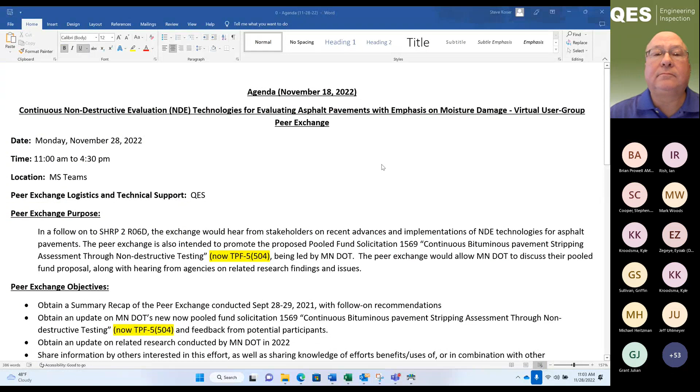Welcome to the Continuous Non-Destructive Evaluation, or NDE, technologies for evaluating asphalt pavements with emphasis on moisture damage, virtual user group peer exchange. We have it scheduled for 11 a.m. today to 4:30 p.m. Eastern time.

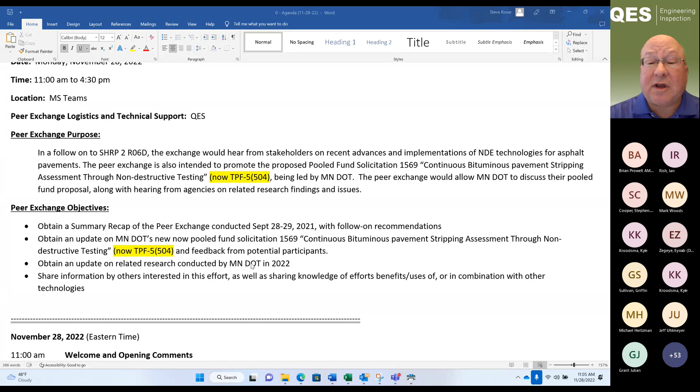Also obtain an update on related research conducted by MnDOT this year in 2022, and then share information with others interested in this effort, as well as sharing knowledge of the benefits and uses of, or in combination with, other technologies. So that's the purpose and objective for today.

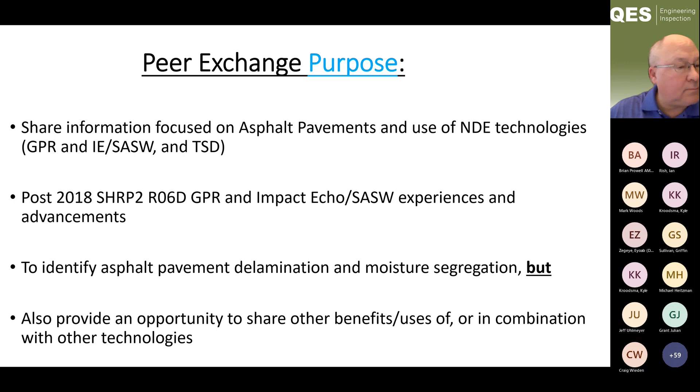What's happened to these efforts since the R06D, and to focus on the delamination and moisture segregation issue with this particular offshoot of the R06D, and to be able to capture experiences of others and advances in the technologies the vendors are making.

Next, Steve. The objectives included having a recap of the actual last R06D meeting in August of 2018. Share agency experiences, and we'll quickly go through those and identify the advancements that vendors had made since 2018, and we'll summarize those again quickly as well.

Next. Identify gaps hindering advancements, specifically focusing on system improvements, research needed to fill those gaps, and identify strategies to continue the progress of the effort for NDE. Next, Steve.

So we started out with a recap of the actual R06D research work that was presented by Mike Heitzman, who was the PI on that effort, and provided us a very good background. We'll quickly recap some of that.

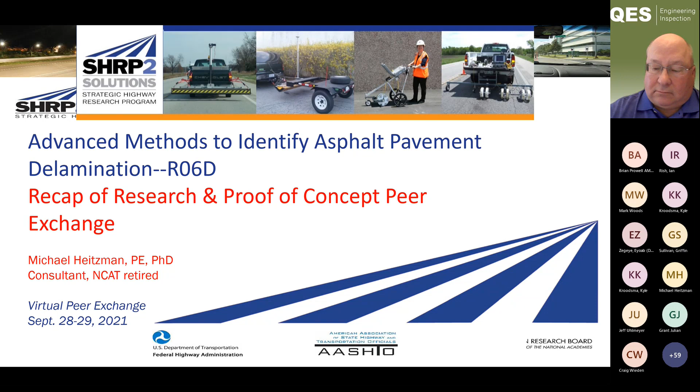So the goal is to identify and develop NDE technologies that can detect delaminations, operate at reasonable traveling speeds, and capture data from a full lane width. Three NDE technologies that were identified during that effort was ground penetrating radar, the impact echo, and the spectral analysis of surface waves.

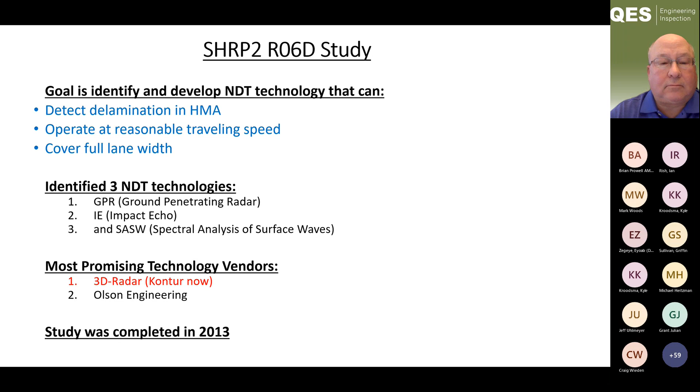Coming out of that effort, the most promising technologies were determined to be the 3D radar, which is now Kontur, and Olson Engineering's work with the impact echo spectral analysis of surface waves. And that effort was completed in 2013.

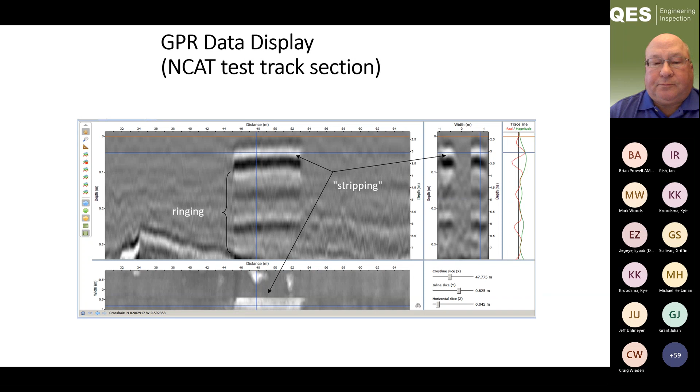This one, and probably most of you are familiar with this, is the gray band signals that are used to interpret ground penetrating radar, and as indicated by the arrows, some indications that stripping is showing up in this signal.

So quickly to talk about some of the vendors involved, GSSI participated to look at things like delamination detection, layer thickness, subsurface conditions, and void identification.

3D radar, or now Kontur, presented this version of a prototype for capturing full lane width data using 3D radar systems.

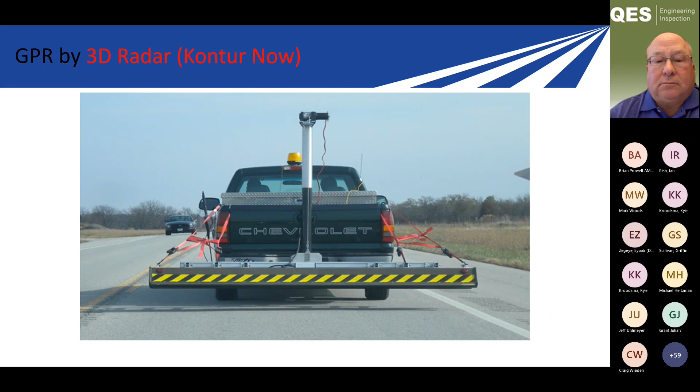There was some development work taking this forward with the focus on increasing from single point measurement or single line measurement to broader width measurement across the lane.

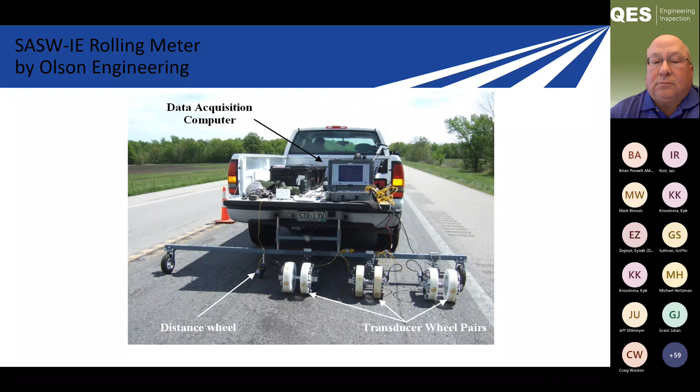So Mike Heitzman's summary said that the vendors need agency interest to support their development in the systems, and the agencies need implementation or implementable systems before investing in the equipment. So we have this kind of need from both sides of the issue that each depends on the other side.

So that's one of the big values in having these peer groups together, so that we can talk about those, focus on those, and learn from each other as we go forward.

Mike concluded that both technologies, the GPR and the impact echo and SASW, have strengths and weaknesses. They can be used for multiple agency evaluations of pavements. Seemed to be most useful, at least at that time, for project development, and not so much ready at that time for system-wide analysis. Both technologies need better automated analysis software.

A large amount of data is produced, and it's difficult for the users to deal with that unless there's a tool to help manage that data and to make it useful. And at that time, the return on investment seemed better focused for rehabilitation projects, with the emphasis on getting better data in design and limiting change orders that happen in the field because of minimal information that we've had historically.

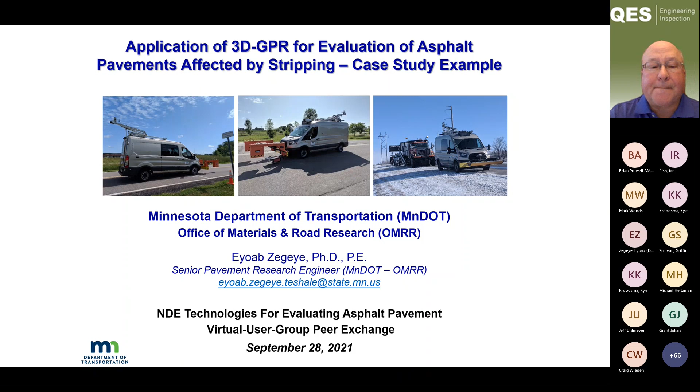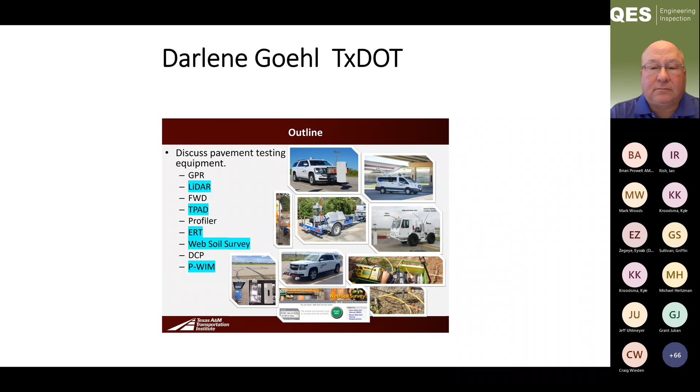Darlene talked to us in a very interesting perspective about how TxDOT combines different NDE systems to collect information that helps them build a better picture of the conditions in the pavement and how it's being used in their project development.

Brian talked to us about his work with the TSD and VDOT's experience in using the TSD, which is very interesting information and something that people have been working on for quite a while now, about 30 years. So it seems to be maturing and coming to a useful situation.

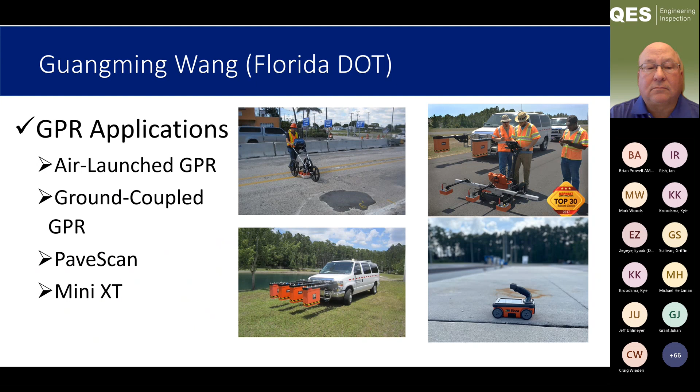Guangming talked to us about the different types of devices that Florida has worked with and are trying in their efforts to collect better pavement information. Several are listed here and some photos of their efforts.

Bill Owen talked about the Caltrans experience with the GPR. They go back a couple decades and have been working with this for quite a while. A lot of their work has focused more on the assessment of concrete pavements, but it's still the application of the GPR and interpretation of those signals.

And finally, Brad talked to us about the work that has been going on in Kentucky and pointed out that early on in the R06D, they got the 3D radar sensors, but they had to develop their own system for mounting the device to collect data on the highway. So that was an interesting and somewhat unique aspect of what he came up with.

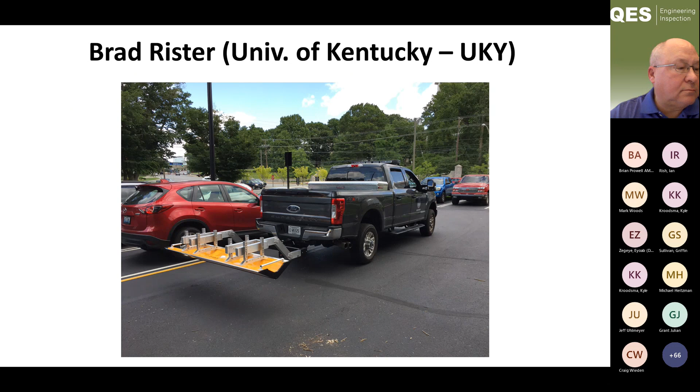We followed that with presentations from the participating vendors: from 3D Radar, Jacopo Sala; Larry Olson from Olson Engineering; Rob Sommerfeldt from GSSI; Ken Maser from InfraSense; and Timo Saarenketo from Roadscanners, all talked to us about what they've done, the progress they've made, and what's going on in their particular sphere of this technology. So we'll scan through those again quickly.

Jacopo introduced the 3D radar system, which includes collection of data at highway speeds, a data processing system for the three-dimensional data, and how the technology and product components come together.

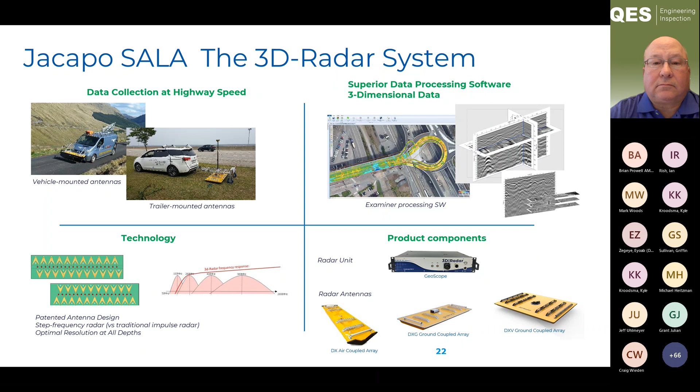Larry Olson gave us an overview of his development of the impact echo and spectral analysis of surface waves, and the development work they have done, and their ongoing efforts to continue to promote and improve that technology.

Rob Sommerfeldt talked to us about what GPR is, how it's used in determining layer thickness, void, subsurface evaluations, and numerous other applications.

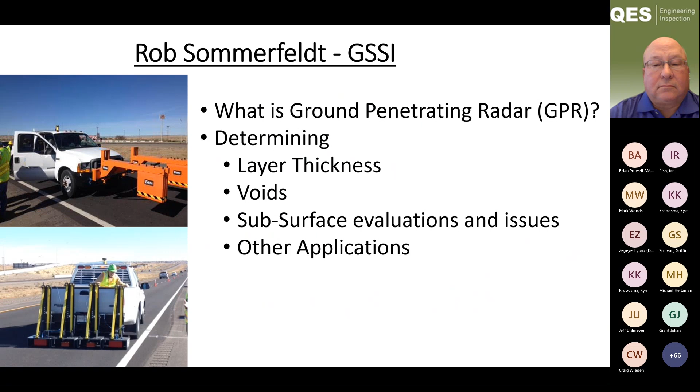Ken Maser from InfraSense talked to us about the discussion of technologies, including GPR, 3D GPR, and the TSD, with applications for pavement management, pavement rehabilitation design, in-place recycling, density quality assurance, and failure investigations.

And finally, Timo Saarenketo talked to us about the Road Doctor vehicle that they use for survey and the multiple technologies that have been incorporated into a single vehicle to pull the data together and get better interpretation of the various component parts.

We then followed that with a discussion of current and future needs and identification of gaps. We looked at questions including what research is needed, what improvements are needed to promote widespread use, where do we go from here, and what kind of support level is needed to continue to move forward with this technology effort.

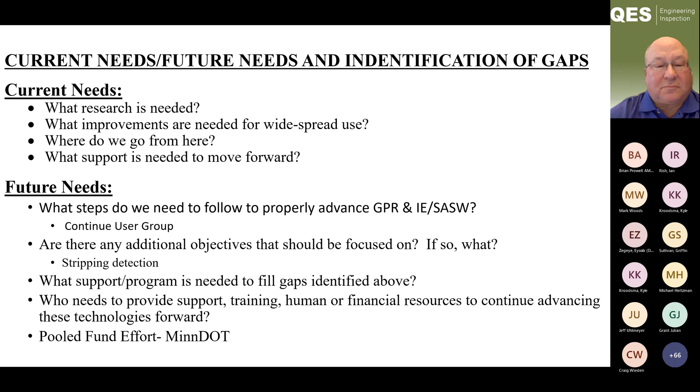We talked about possibilities of how support can continue for this effort, and as Steve Kozer said, Minnesota is leading a pooled fund specifically devoted to this particular objective.

So we talked about strategies and how the individual areas of NDE applications should be identified. Those applications include use in planning, design, construction, and quality assurance.

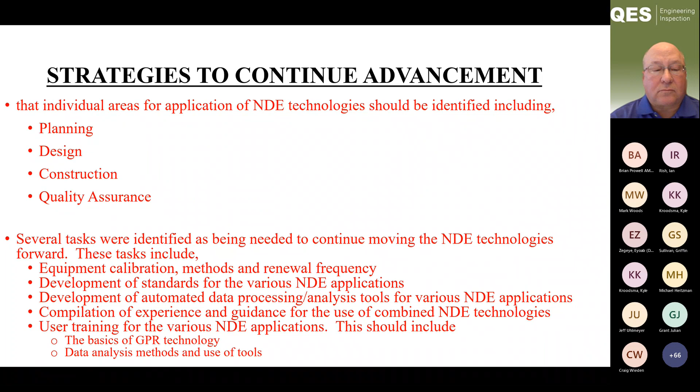Several tasks were identified as being needed to continue to move this forward, including methods for equipment calibration and renewal, development of standards for various applications, development of automated data processing analysis tools for various NDE applications, compilation of the experience for the use of combined NDE technologies, and how user training should move forward, including basics of GPR technology and data analysis methods and use of tools.

So I think that pretty much wraps up the quick summary of the previous meeting we had last year.

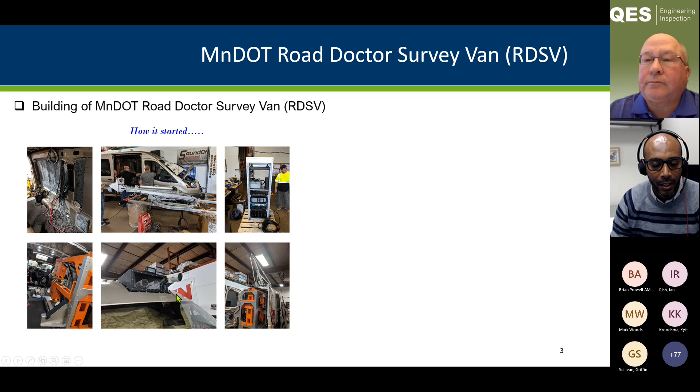So what is interesting about this road doctor survey system is that it has multiple sensors that are linked to one navigation system, so that you can basically connect, link, or fuse the data from all these sources to have a better understanding of your pavement condition, both on the surface and also in the subsurface.

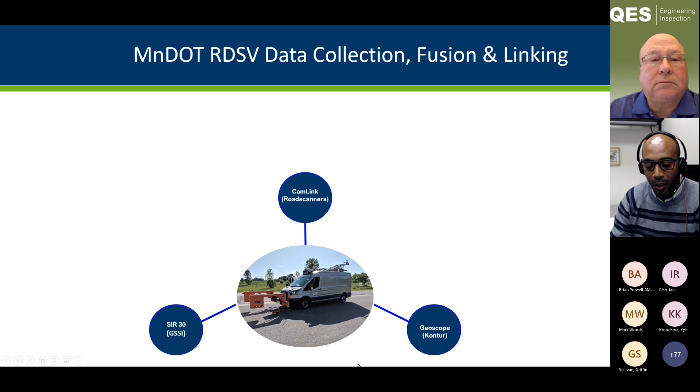So the three main computers, data collection controls that we have in the van, are Camlink, Roadscanners' CamLink, GSSI SIR30, and Kontur's Geoscope. The Camlink governs almost most of the sensors, including the positioning and navigation system, GPS, IMU, and DMI, two high definition video cameras, a thermal camera, and an accelerometer for roughness, ride quality, and the LiDAR scanner. The LiDAR scanner, as you can see, is on the end, on the back of the van.

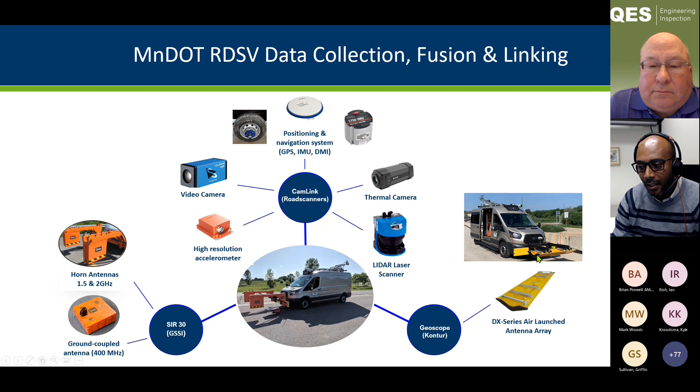The SIR30 controls the two horn antennas in front of the van, you can see here, and the ground coupled GPR antenna. The Geoscope controls the 3D radar antenna that we have. As you can see, the van is designed to accommodate both the GSSI antennas and also the 3D radar or Kontur antenna, and the Geoscope controls it.

For data processing, we use Road Doctor and Examiner software. The Road Doctor is suitable for processing all the data obtained, collected using the system, while Examiner is more suitable for the GPR, 3D GPR analysis. And you can also load the video image so that you can use it to help the interpretation of the GPR.

Before I talk about how we use this technology, let me take a brief detour and explain some of the challenges in adopting innovative technologies in the pavement industry in DOTs.

Through my experience, I have seen a lot of excellent research and innovative technologies come out from research and development, but fail to attract enough attention to move on. Ideally, once these tools come out from research development, they would transition to DOTs or road owners, to road authorities for implementation.

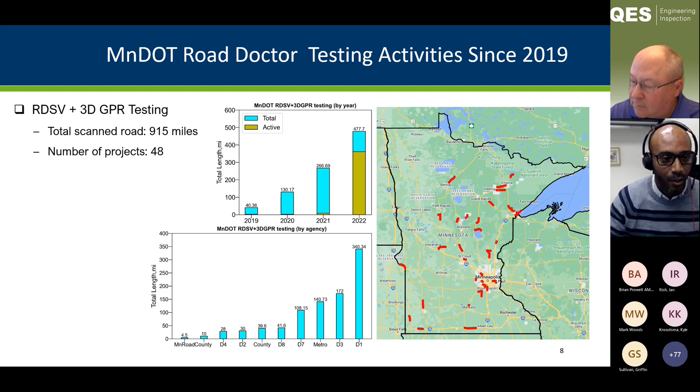So just to give you some examples of the research studies we are conducting, one of the early studies we did was using the Road Doctor, especially the data fusion capabilities of the Road Doctor, for studying tenting on Minnesota pavements, especially on colder region pavements — tenting or crack heaving studies.

I won't be able to give too much information on this, but if you are interested, we do have a published paper on it here on the right, or you can send me an email. We can talk more about it.

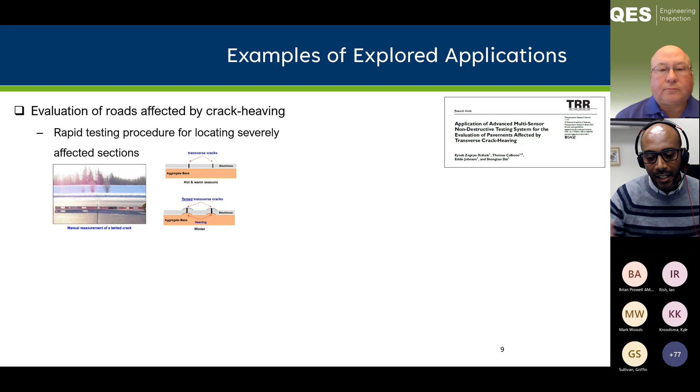And then finally, by analyzing all this data coming from IRI, elevation profiles, and GPR, we were able to provide a rapid testing procedure for locating and characterizing pavements affected by tenting.

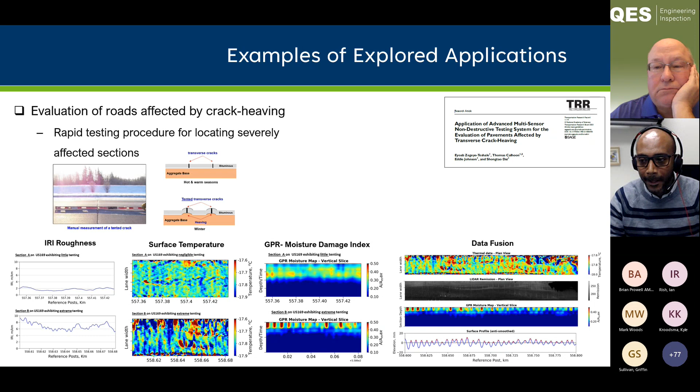We often use the system also to detect sinkholes or voids under concrete. This is not always successful, because depending on the type of pavement, some concrete pavements are highly reinforced, or the pavement condition may not allow it. But most of the time we've been able at least to pinpoint suspect areas for further investigation. We've done sinkhole detection both before and after grouting, just to see how effective the application is. We did find the ground couple antenna is better suited for this type of application.

Here I'm showing you an example where we're trying to see if 3D GPR could also be effectively used to check the alignment of tie bars or dowel bars.

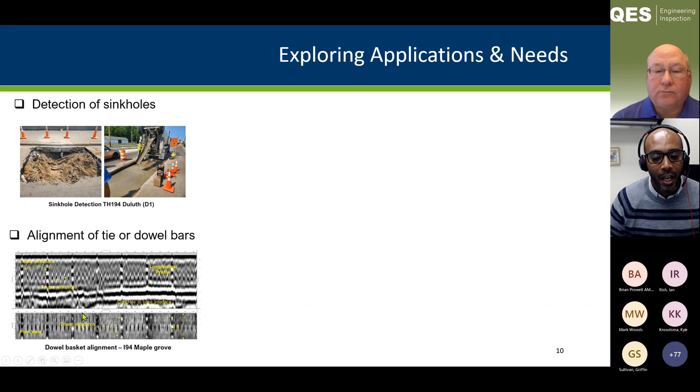Another example is the research study we conducted at the MnROAD cells for over two years now, using the GSSI ground couple antenna at the beginning. What we were interested in is whether GPR can be used to measure or assess the moisture content in the foundation of in-service pavement, to see the moisture fluctuation across the season.

This is useful in many ways. One is that it's important for us to measure the moisture fluctuation, especially in March during the spring thaw period. But this could also be a very useful tool to find areas that could be easily affected by stripping, because the more moisture you have in the pavement, or the more moisture susceptible the pavement, the more likely it is to create a good platform for stripping.

So here the chart shows GPR estimated volumetric moisture content compared to in-place sensor estimated moisture content. As you can see, we saw very encouraging results.

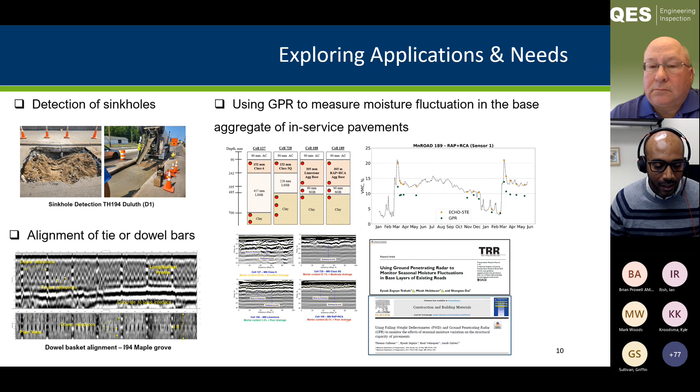We published these results in a TRB paper, and also another paper where we saw the relationship between the GPR indexes and falling weight deflectometer (FWD) indexes. Currently we're working with Contour 3D data, trying to see if the same thing can be achieved using the full length 3D GPR ground couple antenna.

So with that, I would love to talk to you a little more about some of our efforts to incorporate 3D GPR into the MnDOT project scoping process.

In the project scoping process, the main task is to gather key engineering data that will help us select the proper rehabilitation for our pavement. The two main pieces of information are the thickness variability, both longitudinal and transversal, and the structural adequacy of the pavement.

You want to make sure the pavement is strong enough, or that the remaining pavement that has not been rehabilitated is strong enough to support the new traffic and the construction equipment.

For example, if you decide to use a cold in-place recycling or a white topping option, it's important to know the thickness of the AC layer in order to determine the proper target mill depths, but also to know if the remaining pavement will have adequate support and bearing capacity to support the construction equipment and the new pavement and traffic.

This adequate structural support is not only a function of thickness, but also of the quality of the remaining pavement. If this remaining pavement is deteriorated, if you have a lot of stripping, then you'll be forced to reconsider your rehabilitation. We've seen this in many of these projects.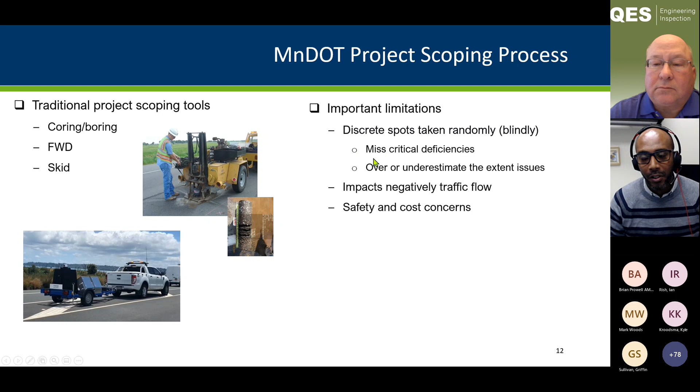So far, we've been doing this using traditional project scoping tools like coring, boring, FWD, and skid. But these tools have some important limitations. Especially coring and boring, they are destructive. But the main limitation is these are discrete spots taken randomly, blindly. You don't know what is going on beneath that pavement, so it's very likely to miss critical deficiencies or to over or underestimate the extent of these issues. They also impact traffic flow negatively, and come with safety and cost concerns to the public and operators. Because of this impact, you're constrained on how many tests you can do in your project.

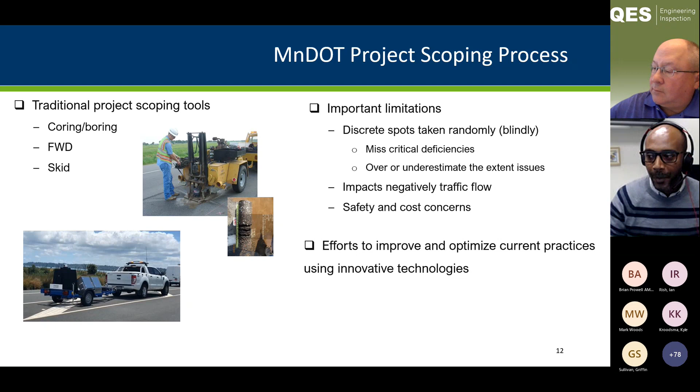Because of this, we've been trying to improve these practices using innovative technologies. One easy, quick advantage of 3D GPR is to use the 3D GPR images to guide the coring and boring practices in our project scoping. We don't necessarily have to replace them, because you still need coring and boring to get a feeling and visual understanding of the material, but you can do this strategically by collecting coring and boring where it's needed.

For example, here I'm showing you a GPR image where it's a clear image. You do see the interfaces of the two layers clearly visible, and the pavement is very homogeneous, so you don't need that many corings—just a few, maybe for calibration and to see what's going on beneath there. On the opposite, you see here sections that may require more testing, more GPR coring, where you can strategically select these areas for coring so you know what is going on.

If we had done this randomly every tenth of a mile, we probably would have missed these sections, and we would have generalized what we saw in those sections to the entire road. This type of intelligent coring has been very helpful to reduce the number of spot tests. We can also use this information to prioritize which lane to core or which not, reducing impact to traffic and mitigating safety and cost concerns.

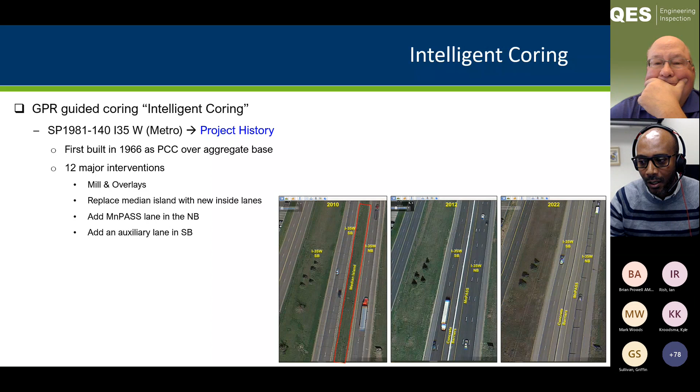In this case, this pavement was subjected to numerous mill-and-overlays. The median was replaced with an inside lane; they created a managed lane only in the northbound direction and added an auxiliary lane in the southbound. You can imagine how some of this information may get lost over the 50 or 60 years it's been there. So when the engineers approached us to analyze and evaluate this pavement and see what's going on in the subsurface, we used the 3D GPR and intelligent coring.

How do we use intelligent coring? As you can see here, I'm showing three different lanes of the pavement. The first thing we saw was that the middle lane and the outside lane were almost completely similar, so there was no need to have cores taken on the mid lane and add additional burden to traffic. Between the mid lane and outside lane, we focused most of our coring only on the outside lane. In this first southern portion of the road, it was pretty much uniform and homogeneous—we clearly identified the lanes and interfaces—so there was no need to put too many cores there.

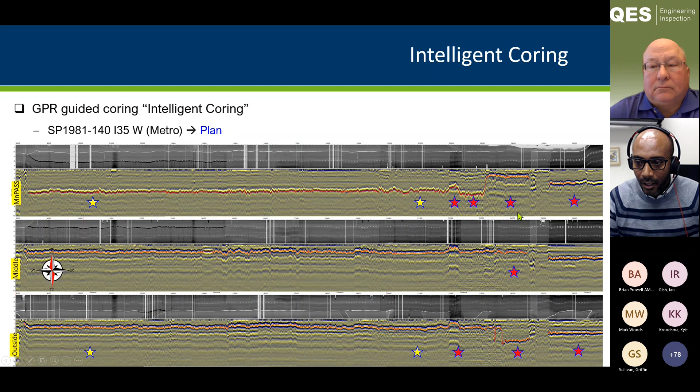On the other hand, on the northern portion of the road, we did see certain strong anomalies that we wanted to test, so we had more corings performed in this area. Here is the result of the study. As you can see, we were able to pinpoint all the transitions and also able to see the different pavement structures.

As you can see, these transition points are not easily achievable using coring or boring. But most importantly, we were also able to identify sections that were not previously well documented. So the engineers were not expecting to see a 13-inch bit on this end, and on this other end of the road, but also this 13-inch full depth bitumen. So this is kind of how the new technology can supplement and help the existing practices.

Another effort that we've been doing—at the beginning I told you, how do you get all this data and transform it into a template that engineers can easily use to extract important information for them. So what we've been doing is creating some Excel macro templates for engineers to use and to read the GPR, 3D GPR results. These macros are given to them, and they help them explore what is the right milling depths.

Basically here I am showing you, this is the road, two lanes of the road, and here are the milling depths. What this chart is telling us is, if you cut this road at around 13 inches, you will be cutting on the top layer, on the asphalt layer. So if this is what you want, you will be ensuring that you're cutting only on the asphalt layer.

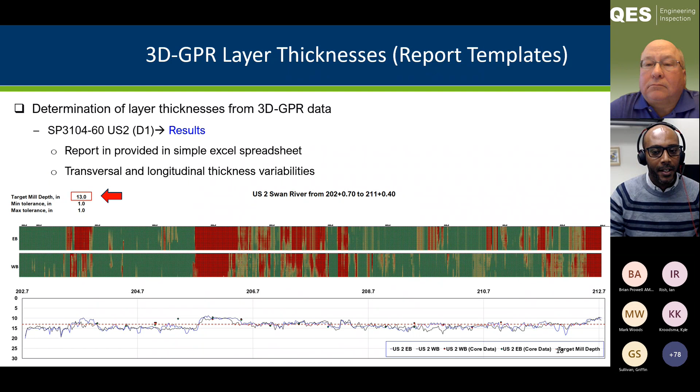And then here, finally, I would like to discuss some of the case studies where we are using 3D GPR to assess pavements affected by stripping. This isn't for all cases, but this is very helpful for the pooled fund study. This is kind of why we think the pooled fund study can be achieved, accomplished, and why it is important.

So here is a case study we've been working on for the last 3 years. What makes this project interesting is it's on Highway 71 in Bemidji, Minnesota. The pavement was first built in 1977, and it was a road mix—an asphalt mix prior to superpave—very susceptible to moisture, over a natural grade clay. Then in 2002, the top portion of the asphalt was replaced with a newer superpave HMA and PASB, which is a more permeable asphalt pavement type.

But then very quickly, the pavement completely deteriorated and became very rough, so they are going to replace it. When they went out and cored, this is the type of core they got extracted from the turn lanes. As you can see, in the turn lanes they were able to extract the entire bituminous layer—here you can see the old road mix, the PASB, and then the new superpave HMA.

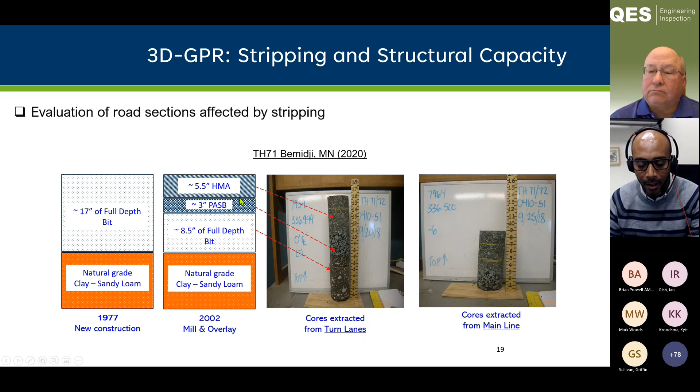Unfortunately, in the mainline, almost everywhere, they were not able to extract by coring the entire bituminous layer. This is because the old pavement in the mainline, where you also have traffic, was completely deteriorated due to stripping. So they were able to extract only the top layer, the newer asphalt bituminous layer.

So here, for example, are the coring results. The black bars are from the mainline, the cyan or blue are from the turn lane. As you can see, the only time they were able to extract the entire pavement bituminous layer was around 333 RP, and that was because that pavement section was recently completely reconstructed. Otherwise, they were able to extract only the top layer.

So how do we know there was something else here? Because they went on and did boring.

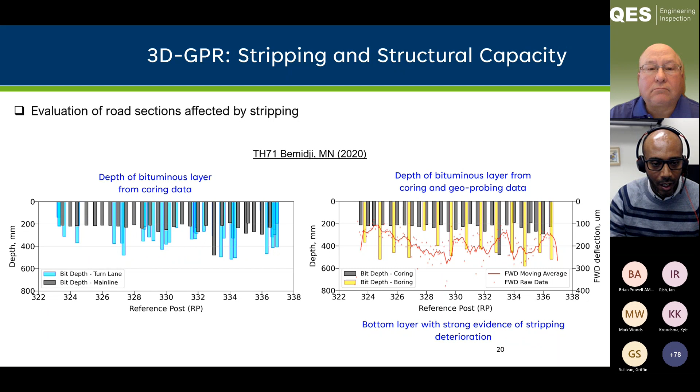As you can see in the boring, they were able to extract all this material, and then they found out that most of the time this material is also deteriorated due to stripping. So faced with this problem, they reached out to us to see if we can at least give them the layer interfaces, the thicknesses for the pavement with the 3D GPR.

And that's what we did. But on top of giving them the layer interfaces of the top and bottom, we also tried to come up with some methodologies for us to assess the severity of stripping on all the pavement sections.

We divided the pavement into 1 mile length loads. As you can see, here is an example of a pavement section which is in relatively good conditions. Here you can see the top layer and the bottom layer, and both of them are very homogeneous. This is a clear image, you can easily distinguish the layer interfaces.

And you don't see a lot of noise. By noise, I mean reflections other than the main ones we're expecting. We are expecting reflections at the interfaces. If you see other reflections between the interfaces that they were not supposed to be there, that's what I'm referring to as noise. So here we don't see a lot of noise, it's clear.

Compare that to a section which is highly stripped. Here you can see the first layer interface, but it becomes very difficult to see the other layer interface because there is a lot of stripping, a lot of noise going on.

So we try to use this type of image. This is qualitative, basically a visual examination of the image. What we try to do is transform this visual examination information into something quantitative, something that can be converted into numbers and compared to other pavement information.

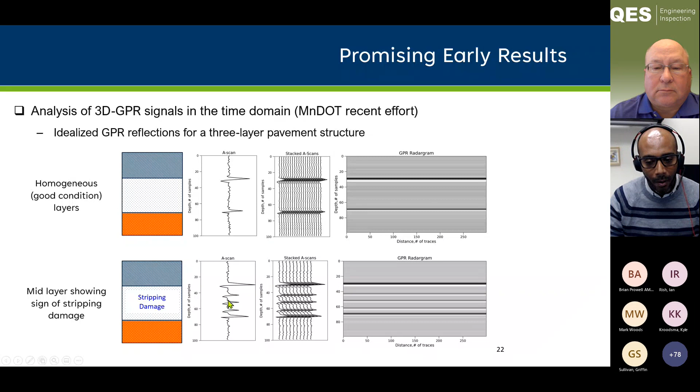So how do we transform this into a quantitative measurement? By doing some research, one thing we saw is that the positive reflections were related with stripping. There is research that shows positive reflections are related to stripping.

So what we did is develop an algorithm in Python. That algorithm was designed first to load and import 3D GPR data, and then to handle each of the traces, each A-scan, separately. Some of the analysis made on each A-scan were to identify the peaks and troughs automatically, and then compute a damage index.

In this case, we decided to use the sum of positive reflection. We did all this analysis in the time domain. There are others that also include frequency domain, but for us, we found this was an easy way of doing it - basically the sum of positive reflection from each A-scan trace.

So once you do this for 21 channels in 3D GPR, you can produce a 2D heat map that tells you what is going on, if there are areas with a lot of high positive reflection. By the way, this positive reflection, we were focusing only on the specified region, only in the layer that you decide. You can decide to look at the entire bituminous layer, or just focus on the second layer, because this is where we know there is a lot of stripping.

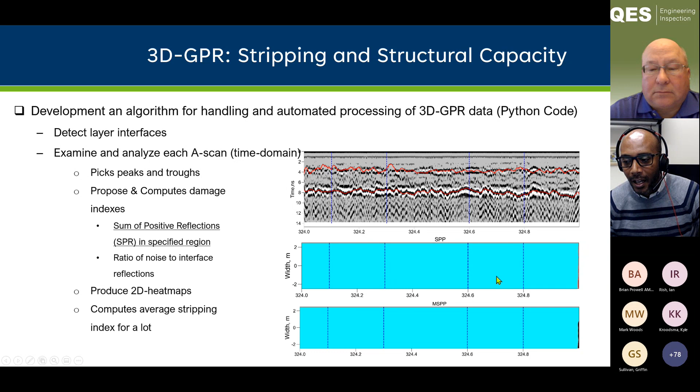By doing this type of analysis for the whole project, you can identify the areas where you have major problems, and areas that have relatively little problem. Then you can use this information to optimize your rehabilitation or repair treatments.

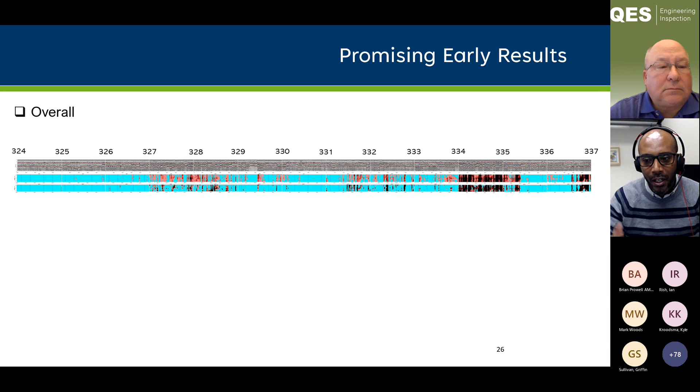But we didn't stop here. We went on because we also had FWD data for this pavement, and we tried to see if the stripping indexes from the GPR we created were somehow related to what we see from the FWD.

And why FWD? Because when you have a pavement which is highly stripped, that means the bearing capacity of that pavement also falls down.

So here, this is a pavement that we saw was in good condition, and here are the FWD deflection basins, taken every 1/10 of a mile. This is a 1 mile project. As you can see, there is a little bit of variability between the deflection basins, but they are very consistent, similar, and they go at about 150 micron.

Compare that to a section that was shown by the GPR image to be highly stripped. Here you can see the sections: first of all, the basin deflections were highly variable among themselves in a non-homogeneous pavement, and you start seeing numbers almost double the rate, 300 at the center of the plate.

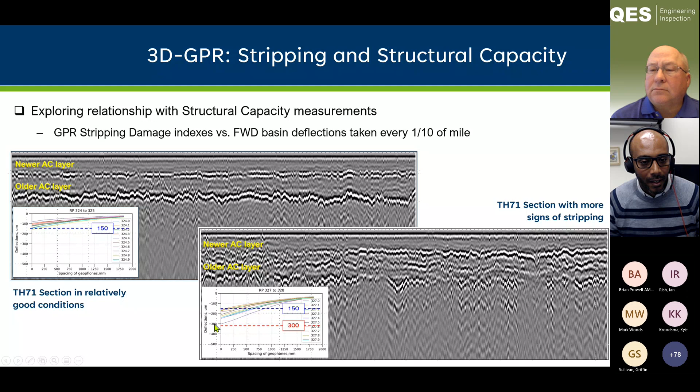So now we move on and try to see if there is a relation. Clearly, there was a very strong relationship between the sum of positive reflection that we saw and the deflection at the center of the plate. This is by no means the end of it, but these are encouraging results that can be useful for the pooled fund study. They ensure us that what we're trying to achieve with the pooled fund study is doable.

So with that, this is the first part. So I thank you, and if there are any questions.

I've been looking at the chat function. One comment was there's a lack of standards and specifications. Training and education could be added to your list. I think that was up around the first handful of slides. And then standards for both data collection and data analysis, presentation and interpretation, is what the one comment was.

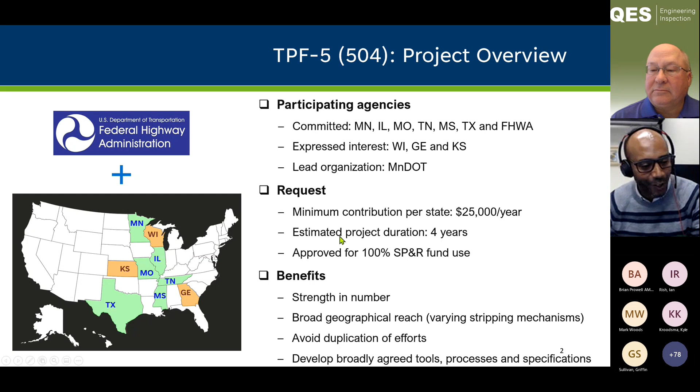So in the interest of time, I apologize, I will go quickly over this. When we created the proposal for this pooled fund study, we started from the recommendations of R060 and TAP studies. We had several meetings between us, MnDOT, and Federal Highways, and then we sent a proposal for review and comment from other experts.

We heard from Mike Hensman, Ken Maser, and other engineers from interested DOTs. So we try to put most of that information there.

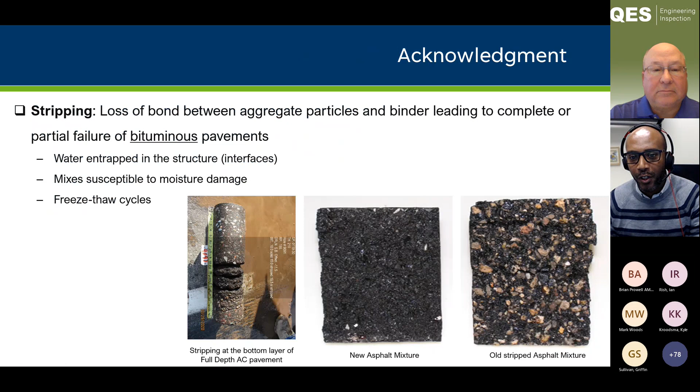So you are aware of stripping, and I touched on why. One question we received during the solicitation, when we were trying to reach out to states, was whether stripping is still a serious pavement threat, since we now have superpave performance, anti-stripping additives, polymer-modified binders, and improved drainage practices.

But unfortunately, yes, it is still an issue, because we keep building on old mixtures. The old mixtures are still beneath the new ones, so they remain susceptible to stripping. We are also using more and more recycled materials, sometimes recycling pavements two or three times, and lately using cold recycled mixtures that don't have the best quality, using emulsion rather than the newest, highest-quality binder.

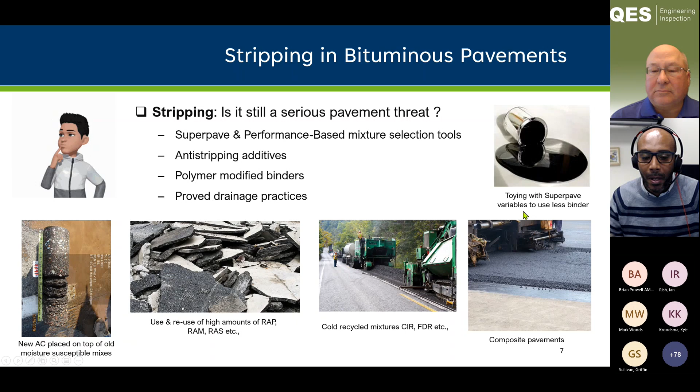We also have composite pavements where we see stripping at the interface between the concrete and the asphalt. And unfortunately, some contractors tweak the superpave mix design to use less binder. So because of this, stripping is still an issue.

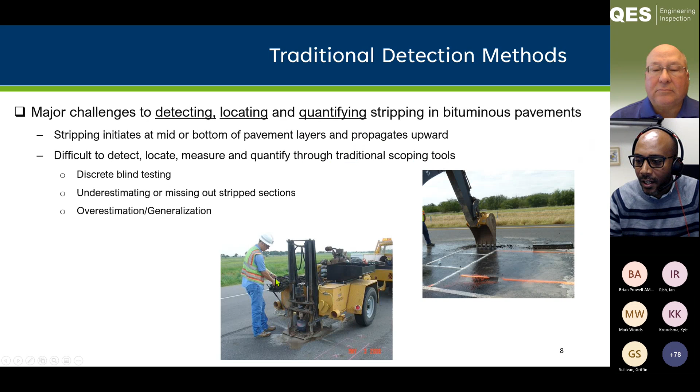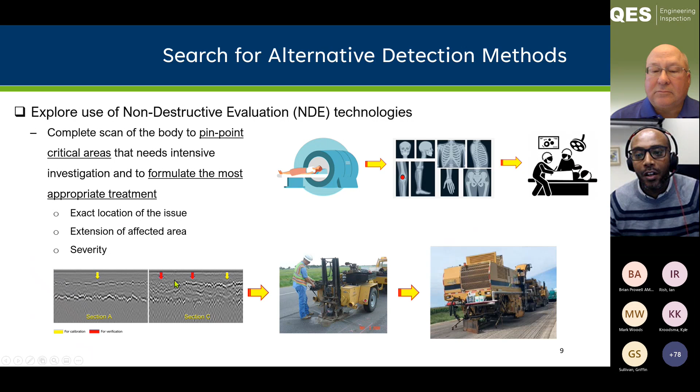I talked about how these traditional tools are kind of limited. What we try to do with innovative technologies is, like with a doctor, scan the pavement and try to find the area where you need to investigate. That's what we're trying to do with this pooled fund study, building on a previous study.

3D GPR is very suitable for this type of study for several reasons. It collects data at traffic speed, and it has different frequencies so you don't have to select which antenna is proper for the application. It's also very implementable - many states are already applying it. So why not focus on 3D GPR?

This is a new pavement, just recently paved - this is what type of image you see when you do 3D GPR. When you go to a pavement that is completely stripped, you see an image like this. So what we want to do is locate the extent and depth of severity of stripping immediately, in a rapid, automated way.

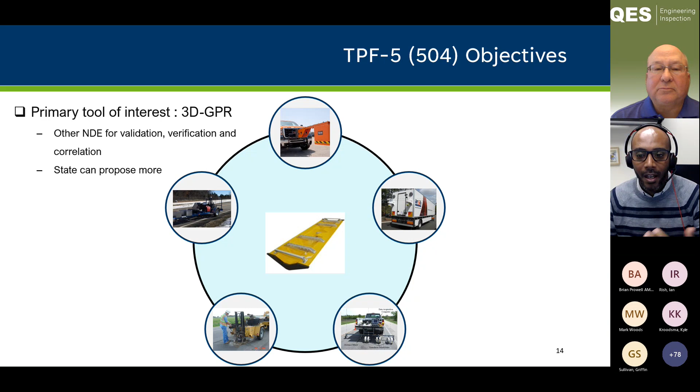For clarification, this study will focus mostly on 3D GPR, but we will use other NDE methods to validate what we see with it, so there won't be overlap with the other TSD program. We know 3D GPR doesn't necessarily work under all conditions, so we'll validate it with coring, boring, FWD, impact echo, TSD - all available methods. If all this information tells us something about stripping, that's also a welcome outcome.

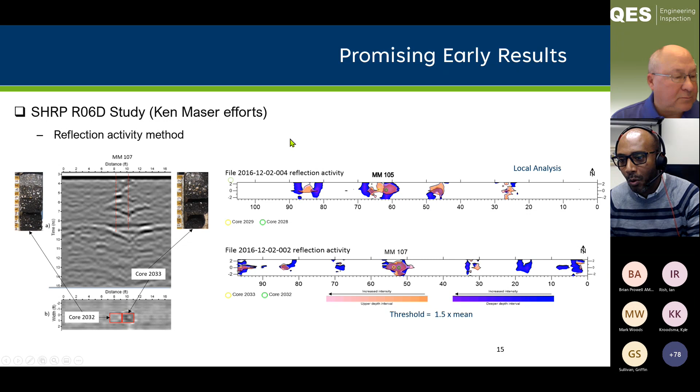We hope to have a project kickoff meeting in early February, where we'll discuss the project charter. Before the meeting, we'll send the final project charter and scope of work to all participant states so they have time to review them. During the project meeting, we will revise and approve the project charter and create a working group.

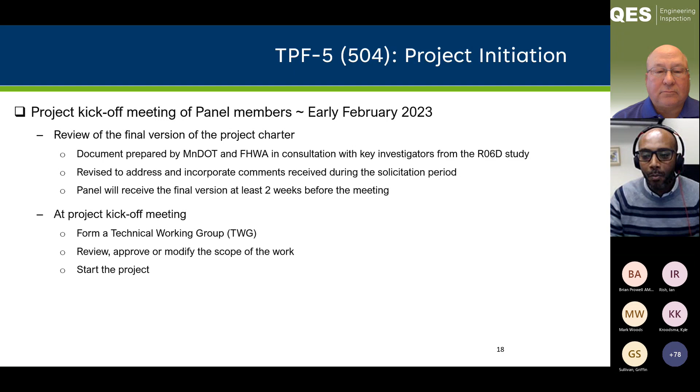These are the proposed steps for the trial. First, it will take some time to finalize and work out the details of all the tasks in the project - we'll finalize the time and budget allocated for each task, and then solicit interest and identify qualified respondents to accomplish each task.

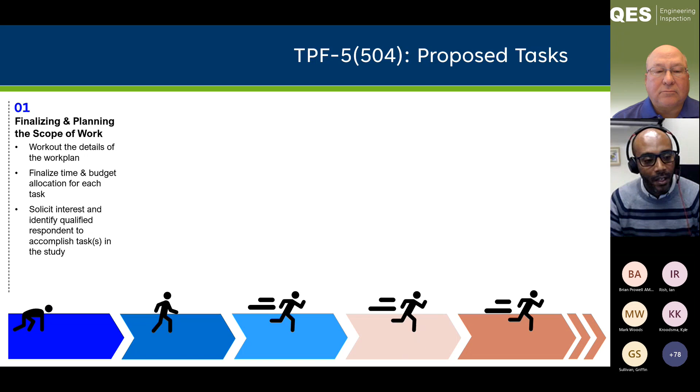So a survey is very important, especially we will administer the survey to the participating states. The reason we do that is because we want to know what type of stripping they have, and what their expectations are from this project.

Then we can do a literature review that emphasizes the stripping mechanism of the states, and we'll also do a synthesis of the NDE technologies. Through this survey, we'll also identify road sections from each state to be considered for the study.

Then third, we will create a GPR stripping signature database. This is very important because most of the time when you are interpreting the GPR, you don't know what type of traces are related to what type of stripping.

So there's a similar effort by Darlene in Texas, and another numerical model based by Ma and Elseifi from Louisiana. What we want to do is build on this and expand different types of geometries, different types of pavements, and try to come up with a database of the types of GPR signatures you see when you have stripping or other moisture-related damage.

We plan this task will include analysis of existing 3D GPR data, laboratory experiments, numerical simulation, and static field tests accompanied with coring data.

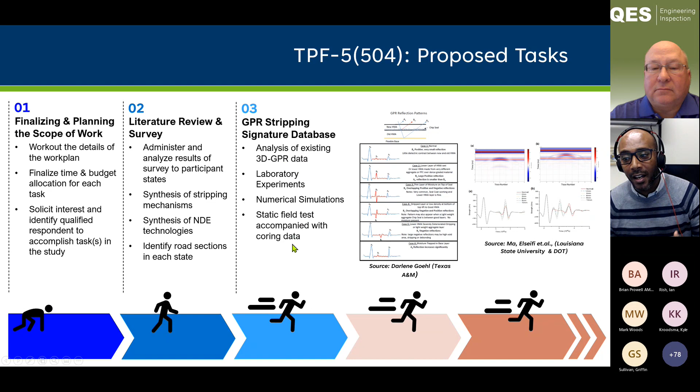And then there is another section where we'll have an artificially stripped section in MnROAD that will be used again to validate what we see in the laboratory, but also to help us develop an algorithm for detecting stripping.

And then the most important part of it will be the creation of software for automated detection of stripping, creating a quantifiable GPR stripping index, and then linking the GPR data with other NDE, providing the result in a geographical map, geo-tabulated output, and producing a user-friendly software package.

This will be one of the most welcomed outcomes, because we would like to come out of this pooled fund study with a product that states can use.

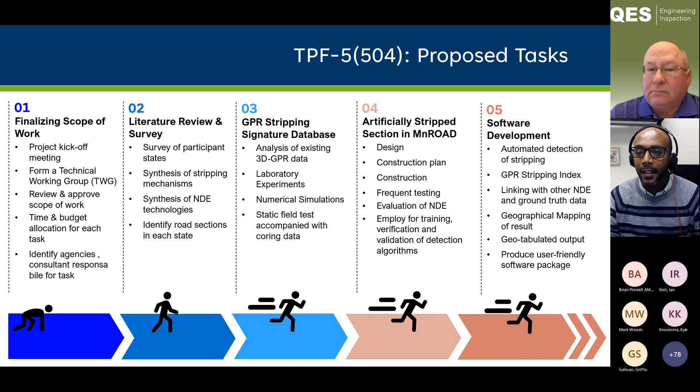And then once we have the algorithm and the testing procedure in place, we will use all this testing technology to evaluate at least two roads from each participant state, roads that are known to have stripping issues.

So we will collect data, we will process the data, we will verify and validate the tools developed, and using this data, we will hope to come up with precision and reliability information.

So the precision, the reliability, and all this experience will then help us develop specification guidelines for data collection, for processing, and guidelines for data collection, processing, calibration, all the information needed to use these technologies.

And then we will also produce guidelines for an implementation plan, and we hope to provide precision limits. All of this will be wrapped up in an AASHTO standard draft.

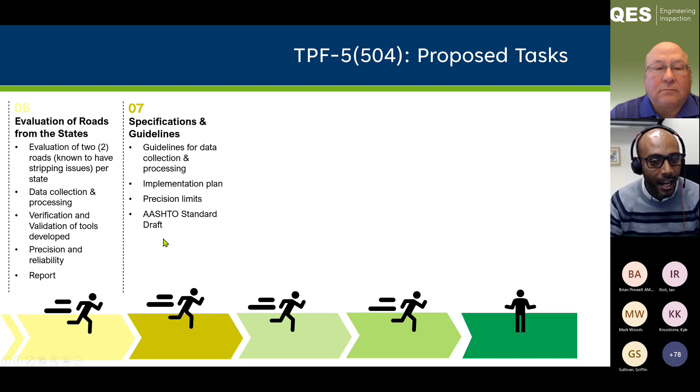And then another important part of the pool fund study is also to have a task for training and technical assistance. We would like to share knowledge among the states, how states are using this technology, what the limitations and challenges are, and use this pool fund study to produce training materials, manuals, and in-person trainings. Support and communication is also one important part of it.

We will keep having user group seminars quarterly and calls with the technical working group as needed. We already have a website for it, but we will keep maintaining and updating that.

Another important task, which should have come earlier, is strategic technology promotion. As a group, we need to try to promote and refine this technology, because the more we use it, the more we hope costs will go lower, and the more knowledge there is, the easier it becomes to use these tools with confidence. So strategic technology promotion is also an important task of the pool fund.

We will have webinars and seminars with road agencies and vendors, and we'll try to disseminate the knowledge as much as we can with papers, reports, and other video materials, or whatever is needed to promote this type of technology.

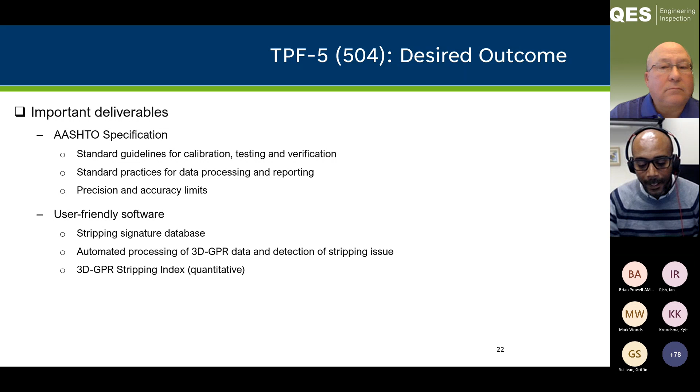So again, I apologize, I've been quick, but I hope I am back in time. So if there are any questions.

Was I quick, Steve? Am I still good? Okay, thank you. Thank you, Iyab.

That was very good, and those last handful of slides are really important. It shows you have a well thought out study planned to be accomplished. You picked up on some of the things mentioned from the previous presentation that could be included, and now they're included in this.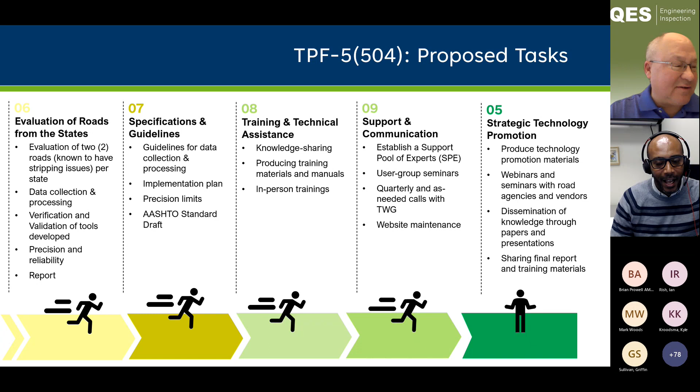Yes, absolutely. We do have a preliminary proposal on the website, but we are going to update that during this solicitation period. We received a lot of comments from engineers at DOT, so we've evolved our thoughts. We've included some technologies we didn't include at the beginning, and some split mechanisms we hadn't thought of before. This solicitation period has been very useful to us.

We have the original proposal, but we're going to upload a newer version so people can read it and reach out to us. Most importantly, we would really love it if you could participate in this study, whether just to follow it or to be responsible for one of these tasks. Please send us your emails and contact information. The more of us there are, the better the success of the pooled fund study. If we can identify the best experts for each task, it will be very helpful to us.

Okay, well, thank you. I don't see any other chat questions added. So can you relinquish the control back to me? Sounds good, thank you.

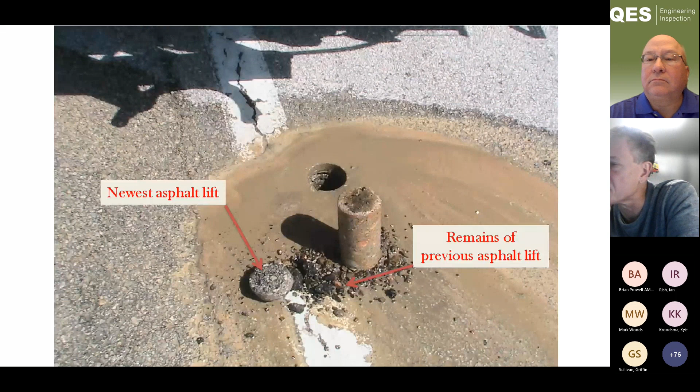The mat looks good, relatively intact, really no deterioration going on. But when you take the core, you can see that while the wearing surface is in great shape, the binder course in between the concrete and the asphalt pretty much just fell apart once the core was extracted.

To give a more extreme case of this, here's a full depth asphalt core, and the top wearing surface looks good, although there's some stripping between that and the second lift. The second lift is kind of okay, and then from there on down it's a pretty bad situation all the way down to whatever that was, subgrade or base, or whatever was originally paved on.

Herein lies the problem as far as milling depth goes. If you go too far, if you get into a milled surface - and this goes to contract - a contractor is out there removing it to the specified depth, and all of a sudden the entire thing starts to ravel and disintegrate.

If it's a composite pavement, a lot of times you wind up milling all the way down to concrete. If it's full depth asphalt, well, you've got to figure out how far down we need to go if this is essentially going to be our pavement on a pretty unstabilized layer. How deep do we have to go?

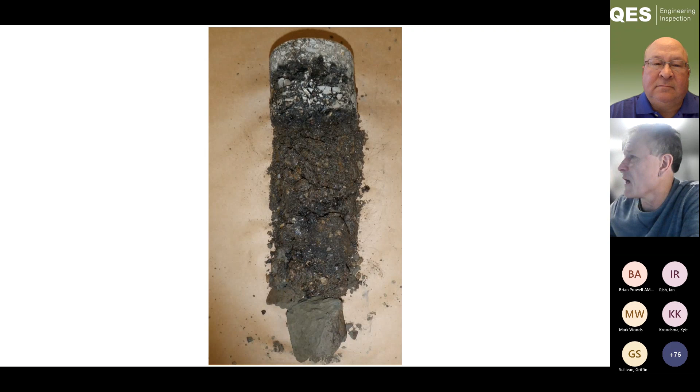The bottom line is you wind up blowing the budget out of the water. You have huge overruns. So this kind of emphasizes why it's really important to know how deep we can go with milling. And I mentioned intelligent coring.

I don't know, we kind of do semi-intelligent coring. I think we generally know where to core. The problem is we can't always safely core in those locations, so we may have to offset at some distance, or maybe go down the road a bit to get away from a merge lane or something like that.

What you like to see is, in Missouri's case, our primary coarse aggregate is limestone, so it's generally a whitish color. When you're splitting those cores, you want to see that aggregate split in half, which means the asphalt is still really adhering well to the rock, and the rock is actually the weak aspect of the mix.

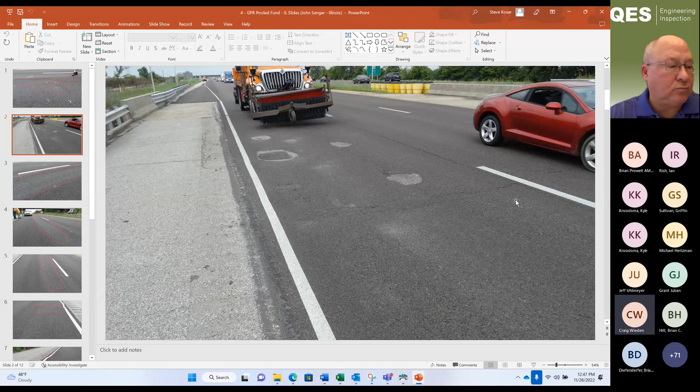Next slide, please, Steve. And those quickly progressed to these pothole-like distresses that went pretty deep in order to get to some of those weaker layers.

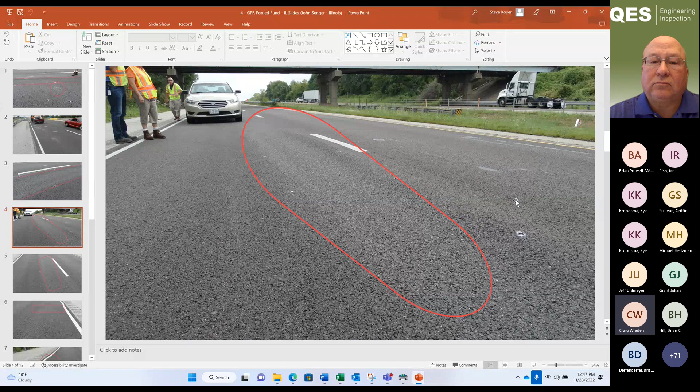Next slide, Steve. Again, just another shot of some of the rutting present on this section of roadway. And then, as you can see, we're starting to get some actual shoving going on because of the instability, or lack of stability, in the lower lifts.

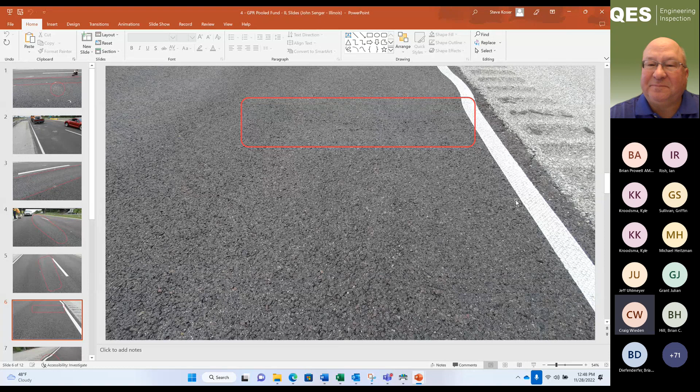Next slide, please. As you can see here, it's starting to actually push the pavement markings off to the side because we're getting so much pavement deformation occurring in that wheel path and in the subsequent area next to it. Next slide, please. Just another shot from a different angle.

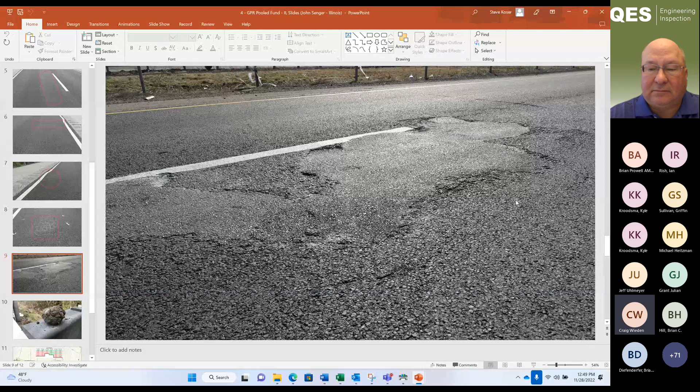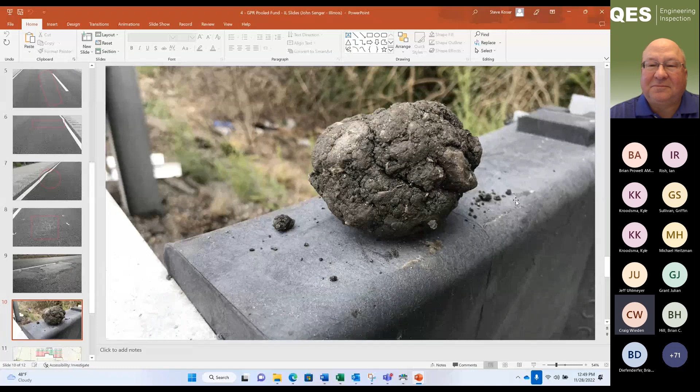So next slide, please. So we ended up going through and doing basically a bunch of coring over this 10-mile section.

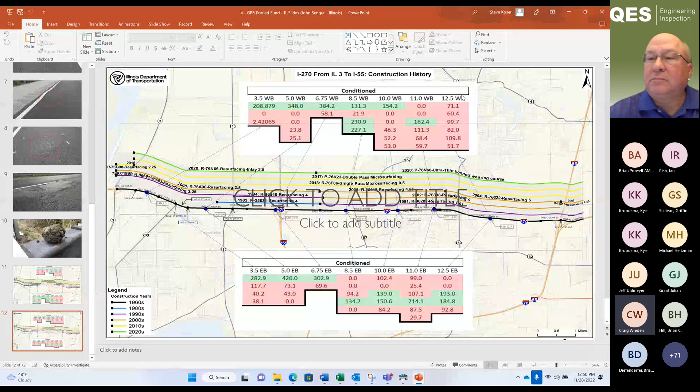Next slide, please. And then this is the conditioned. We had some sections that didn't even record any results whatsoever. So we had a pretty big problem on our hands, and we think we've addressed some of the problems so far. My fear is there's still more out there underlying that could come up and bite us. We just don't have the time or resources to do as much coring as we really need to determine the full extent of the problem. So that's our hope, to create a more intelligent way to conduct coring and pavement investigations for our state, especially since we've got some aggregates that are really prone to stripping.

John, were the tensile strengths conducted on the extracted cores or laboratory fabrication? Yes, the testing was done on the extracted cores from those locations. And we tested all the concrete, and the concrete had compressive strengths of 6,000 PSI and greater. Some were reaching 8,000, 9,000 PSI. So wow, the concrete was in good condition.

Do you think this road would be a candidate for the study? Do you think we can include this, or will it already be repaired by next year? Well, we're trying to just hold it together while we can. The intent is to widen a majority of the roadway in, I think, 5 years is what they're telling us. But assuming the budget holds the way it is, and we know that never happens with state DOT, I think this would be an excellent candidate, and it should still be there by the time we're ready to do some testing. Great, thank you.

Yep, thank you. John, this is Xuntao Dai from Minnesota. During the construction, did you check the density? Did you get the density of the ultra-thin bonded wearing course? We did not check the density on the ultra-thin bonded, just because it's on the existing pavement section. No, we have not done that.

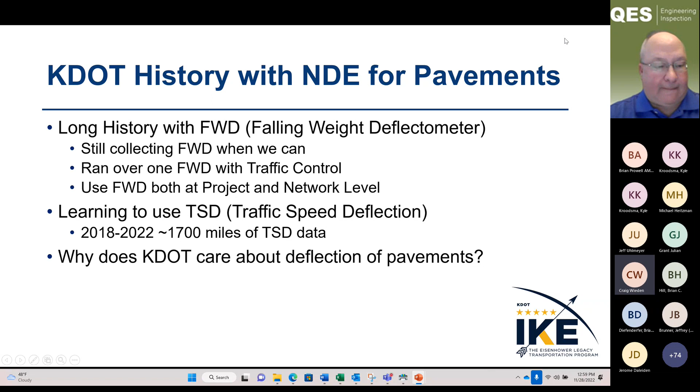If you can hear sound, we can't. Can you hear it now? There's a setting you have to change to share sound from your computer, and I haven't done that before. Okay. Let me... it's a Teams setting. Yeah.

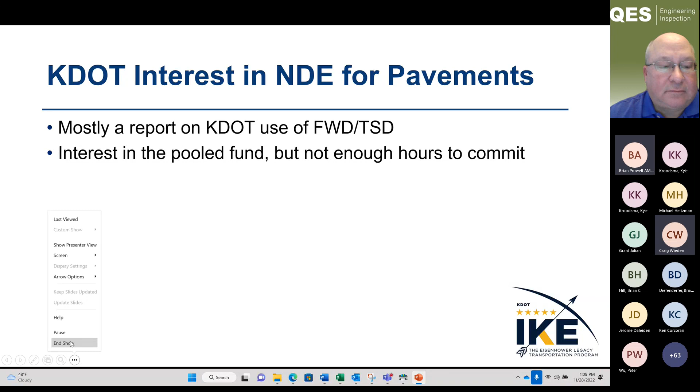You can hear it, Sajith? Oh, is there an audio with the presentation? Is that what you're saying? Yes. Yeah, I've not been able to hear it, Steve. Sorry, I had a phone call come in. I haven't heard any narrative, Steve. No, no, sorry. So did anybody hear that? No, I did not. Oh. No.

So is there benefit just going through the slides and reading off of them, Steve? I don't know, I haven't looked at them. Obviously it won't be the same, but... It might be better just to include it when we send a link to everybody, because then they'll be able to individually hear it. That would be fine. Oh, that's too bad.